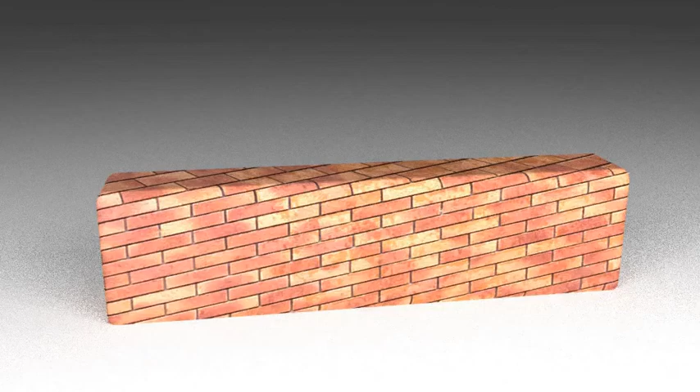As I said before, you can draw any object and apply the solids to it. You have to draw the plan of it before you can.

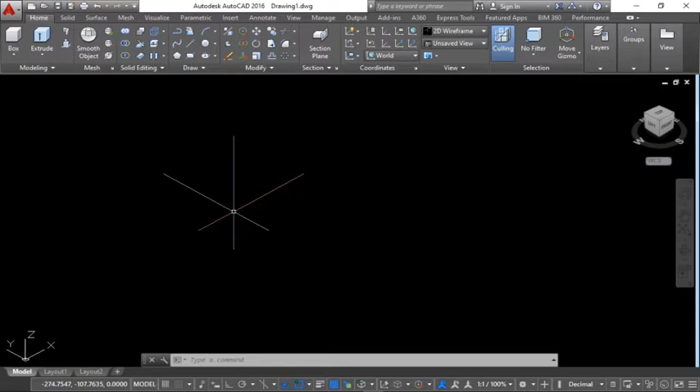Okay. All right, so now that we are having this, if you see this x, z and y coordinate here, meaning we are in the isometric view. You can draw your circle here and start drawing it, but to make it easy, to get your offsetting easy and your center point easy, to know the view properly, to see clearly that you are doing the right thing, you have to change it.

Since we are viewing this object from the top, the plan is you are viewing from the top of it, right? So we're gonna change this to the top view. But if you want to change, I'll do that one in a tutorial where it needs to be taught. All right, we're gonna change this to the custom view to the top view. Now that we are in the top view, you can analyze the drawing here.

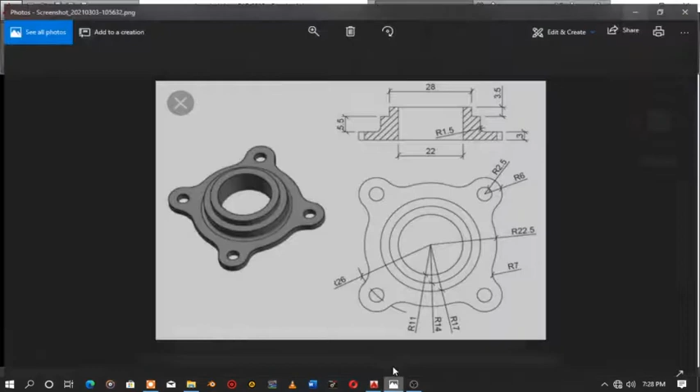So we have done the 2D drawing, so this is very simple. Meaning I'm going to have a center point, draw the circles, and these circles over here, and these circles over here. You get it? So let's draw these 1 2 3 4 circles, which are 11, 14, 17, 22.5. So I'm gonna pick C for circle.

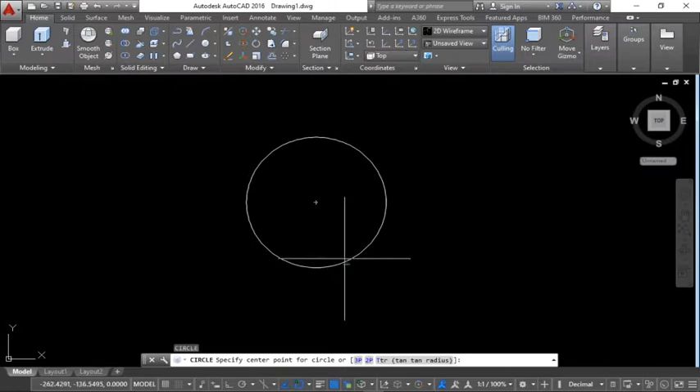I'm not going to do any construction line, so 11, enter to repeat previous command, then radius of 14, enter to repeat previous command, 17, then enter. Now that we are done with this, we are going to do another one, which is 22.5.

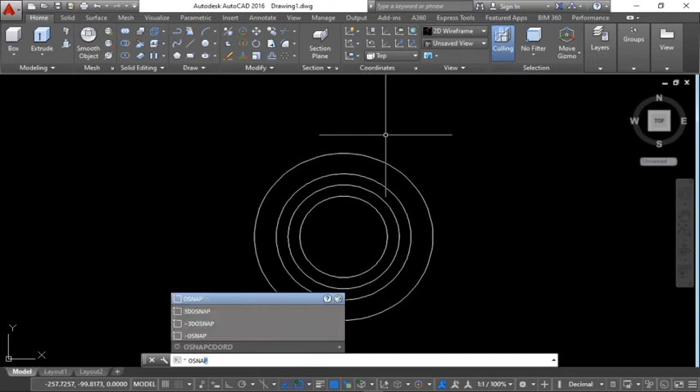So if you are not snapping the center point like that, you just have to type OSNAP, enter, then you select all the snaps. Just type OSNAP on the keyboard, enter, and you get this, and you select all, then okay. That's if you're not snapping the center points.

So now that we have this, if you go back to your drawing, you can see that we are having these 4 circles here, but we don't have any center point for them. But if you see from this angle to this angle, let's say we have a reference line here, and a center line also here, it's going to give an angle of 45, right? Angle of 45. We use that one later.

But you see, we are not having any center point, but we are having a center arc here. So how do you get a fixed point? Not having the center point to draw the circle doesn't mean we can't draw it. We have other ways of doing it, right?

So let's say you're going to draw a reference line, center line here, and this arc here will be meeting the center line over here. Then you stand there to draw this circle at this point, which is not going to be in diagonal form. It's going to be in a vertical form. After that, we do next.

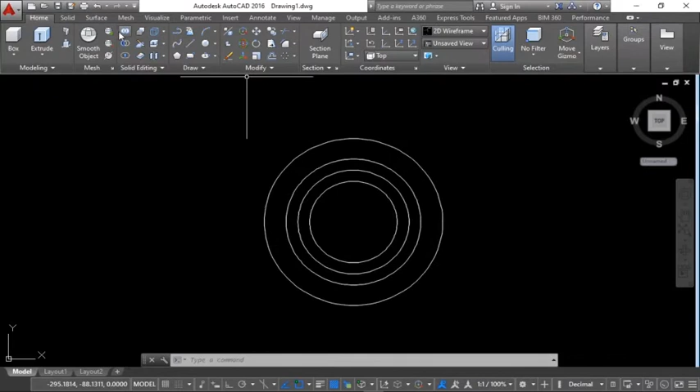Okay, let's go. So what is the radius for the circle? 26. All right, so circle here, radius of 26, enter.

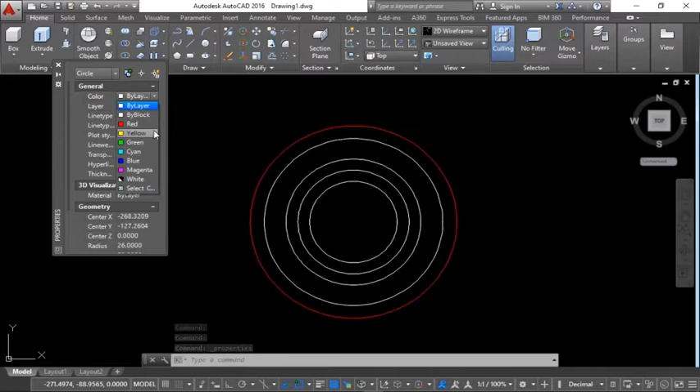Let's change this to yellow so that you can see that it is the center arc. So Control 1 for the properties of the line that you select, click once and click this drop down arrow and yellow, then you close this. Escape to exit the selection of the line.

All right, so let's draw this reference line here. I'll just point the point, and I'll just drag the pointer to this point, but I won't click.

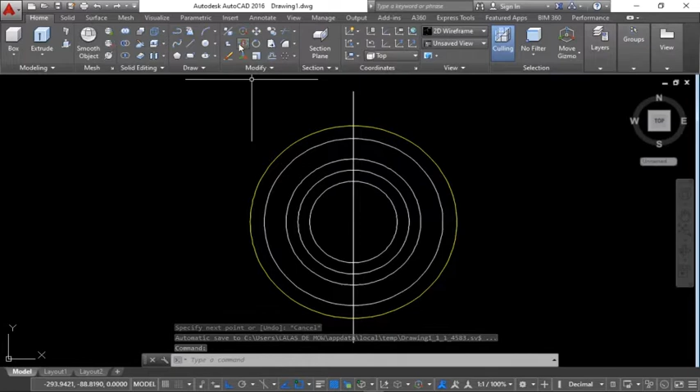Now I'll just move on. Since my extension is on, I'll get this green line, you see, then I'll click at the top, F8 to restrict our line, right, or the ortho mode here. So click escape. I'm going to have a circle here at this point, circle with radius of 6, enter again with radius of 2.5.

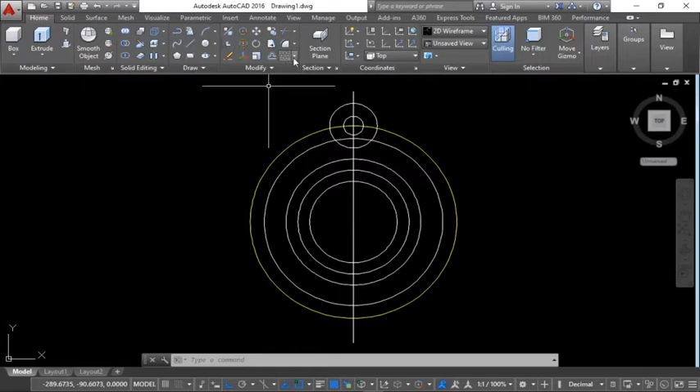2.5. All right, so now that we have this, you need 4 of it, so you can draw one there and draw one there and draw one there. I'm just going to click this, click down, drop arrow and choose polar array, then select these 2 objects, enter, then select the center of the path that I want to do the array on.

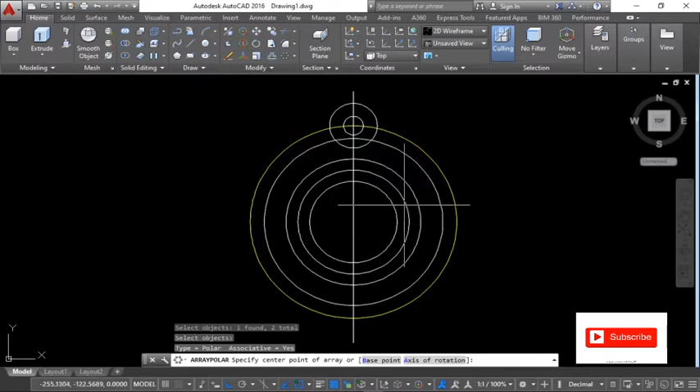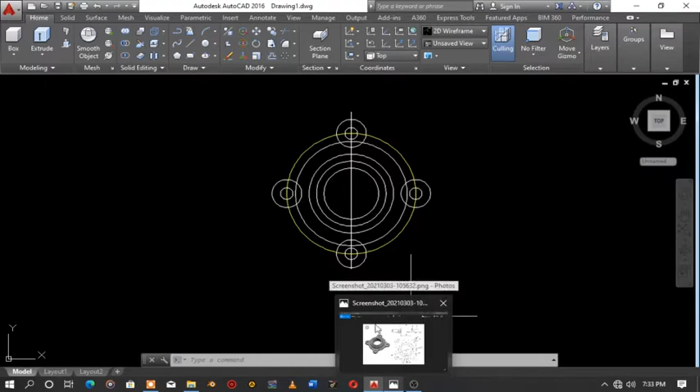So this is the path, and where is the center of this path? Right, so the center of this path is this. All right, click, then it's giving us 6, you need 4 of it, so 4, enter, then we are done. Okay, but we are not done, since we want it to be in angle like that, and ours is in horizontal and vertical positions.

So as I was discussing, we have a line here and a line here, you see, eyeballing. All right, eyeballing, let's use that word. So there's a line here and there's a straight line passing through that, which will give an angle of 45. All right, angle 45. So meaning I'm going to delete this,

then you select this whole object, then I click on rotate, or you click on the rotate first before you select, then you click at the center point. Then this time I'm not going to copy it, but we are going to rotate it. So our ortho mode is on, so you can rotate it to angle of 45, or you can just turn off your ortho mode. So now we are having it at the points, you see.

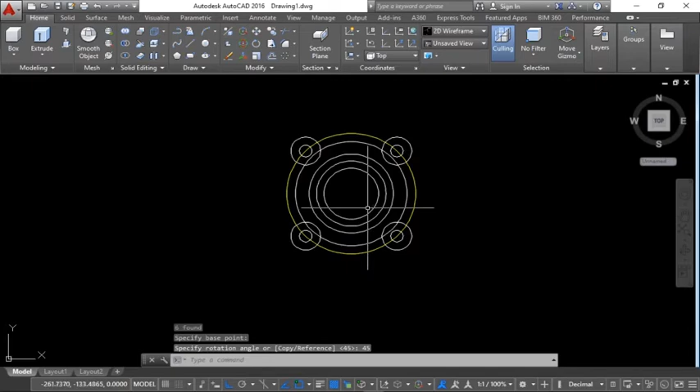So you can just take this off our sight. So we don't need it anymore. It's like using something and you don't want it again, just dump it. So now you can just trim this, but before you can trim, it's one body now, you can't trim it, you have to explode it first. So X on the keyboard, enter, then you select this, then enter to explode. They are now independent, so you can trim it.

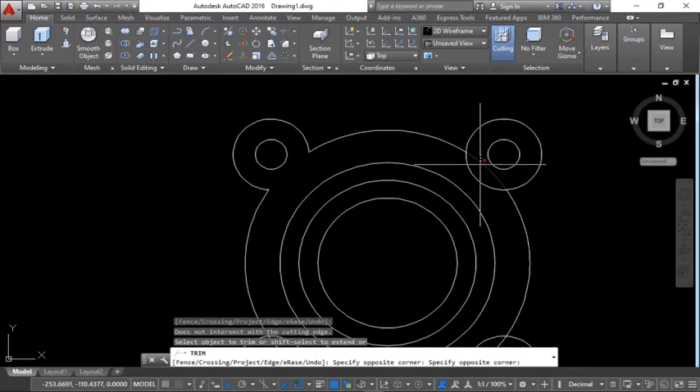So you select the trim, enter to activate the trim command. So click, click, you don't need this, you don't need that, you don't need that, you don't need that.

But due to this drawing, I think the plan is simple, that you can draw the same thing on the same floor, you can draw the same thing. But sometimes in some drawings, you have to draw this circle aside somewhere, draw this one aside, this one aside, then you fix it. You'll be moving and fixing them together. But this is very simple, so you can do them once and for all.

Right, so now that we are done, are you done? Yes or no? You're not done. All right, per the drawing, we are having this fillet over here, which is radius 7, because our drawing doesn't look like this, so let's make it look like that, right? So we're gonna take our fillet here, R for radius, then M for multiple. Type in M for multiple.

So I didn't punch in the radius, sorry. So R for radius, then you type in the radius, so radius 7. Sorry, I'm being confused. So fillet again, then R for radius, then 7 to be our radius, then M for multiple,

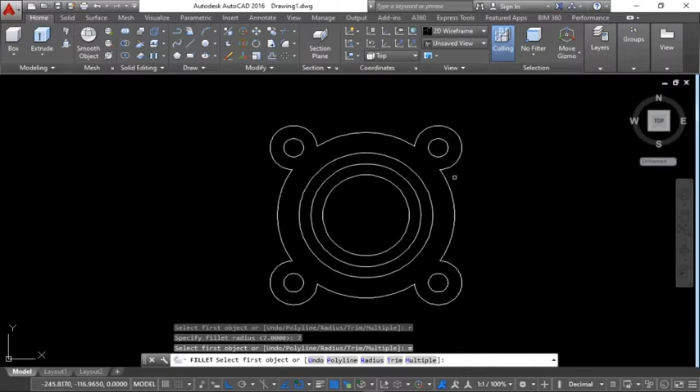meaning you're going to do multiple filleting along these angles with the same radius. Other than that, if you click this and click that, it will exit the command automatically, meaning you're going to do the same thing again. So the multiple will help you do multiple filleting at different angles with the same radius. All right, so if you are going to use another radius, that means you have to exit the command.

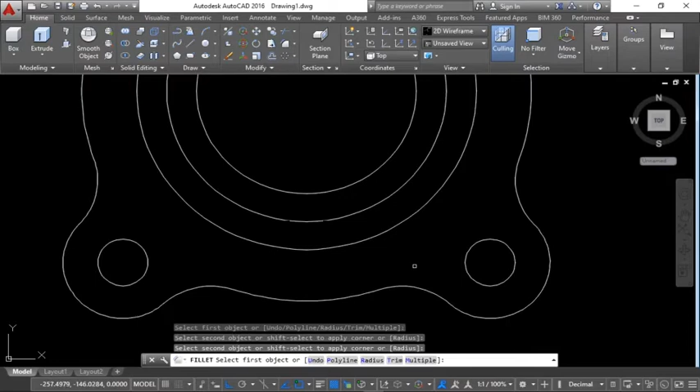Okay, and redo it and type the new radius that you want to use. So enter. Now we are done. Then we click here, the home icon here, to switch to the isometric view, and you can type J on your keyboard. Then you select all objects once.

Then you take our press pull, and now we're having this. No, we don't need it unless you press pull it. But I want to do the first one, the step first, which is 3, as per the sections over here. The first step here is 3, another one 5.5, and the last one is 3.5. Okay, so let's do this.

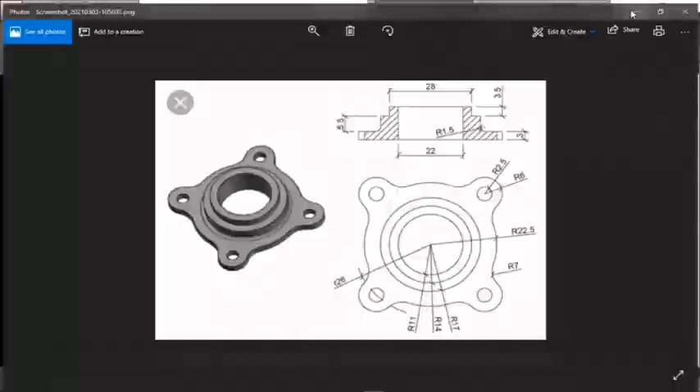We're gonna need this. See, all of them is being highlighted. You don't need it. We just need only. Okay, if you have to do this, you're gonna highlight everything. All right, so now you're having this. So initially, even these 3 circles were highlighted, so I just waited to get the last circle, and the boundary between this last circle and this object over here. So the height is 3.

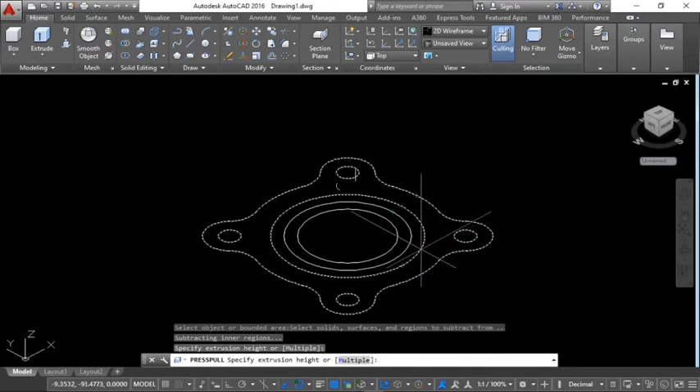Then let's switch to conceptual so that you can see what we have done. So conceptual over here, then we have these circles here. So the last here will give you 5.5. So we're gonna press pull again, select this portion, 5.5. So press pull again.

You are still in the press pull command, so press no, that's not what I want. So press pull, you select this. All right, so I'm gonna have 3. Am I right? 3.5. Oh no, meaning, okay, 5.5, and I'm going to have this is 3.5, meaning 5.5 plus 3.5 is 9. All right, sorry, so we didn't do our calculation well. Okay, 5.5 plus 3.5 is 9.

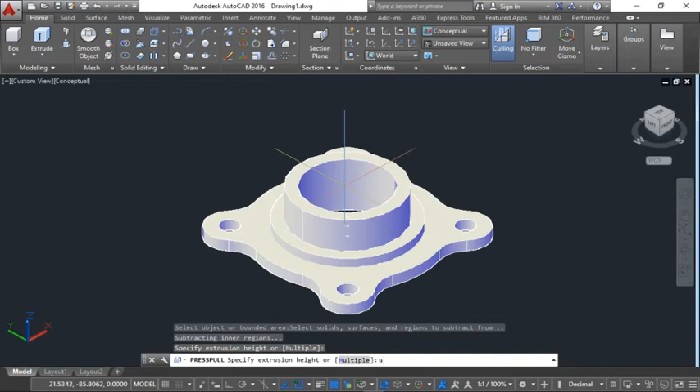All right, let's do Control Z again, escape, because we are press pulling from the ground, right? So we have to do that calculation. So we have to go 9, enter. Okay, now you're having it. You see, we are done, but you're not done.

Let's do one thing. Further in the drawing here, it says there is a fillet radius here to be 1.5. All right, so we're going to fillet this edge here. So let's do it. Everything will come in process as we'll be doing different tutorials. So you move to solid and fillet edge, then R for radius, type in your 1.5, enter, then you select this edge. Not the object, the edge. You're going to get this, then enter twice to confirm.

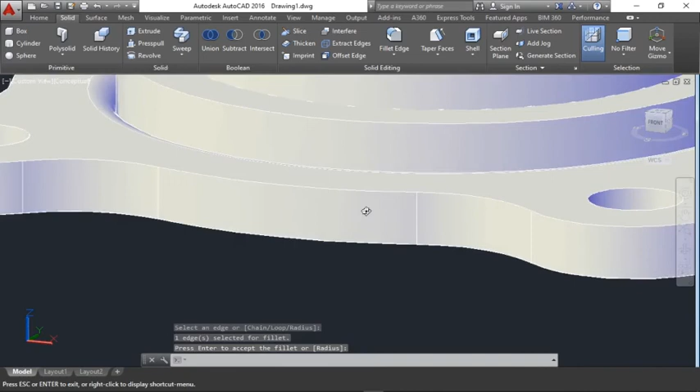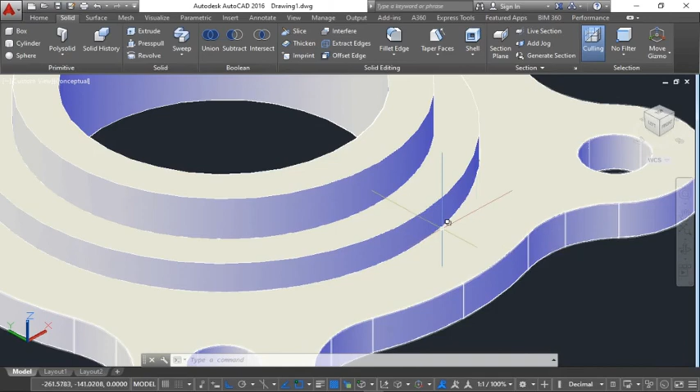So you see the fillet that we had. So we had it inward, which we needed outward. So what I'm going to do is Control Z and undo everything. The reason why we had that is because we're having this object different here, meaning we just filleted the edge of this base. That's why it's filleted inward, and this is shown in the section here. All right,

you're gonna join. You have to use the union. Select the union here. You select this, that, and that, then enter to confirm. So now you have one body here, so you can apply your fillet here, then R for the radius, then 1.5, enter, then you select this edge. So now this edge and this edge are joined together. There you go, enter twice to confirm. So now we have it in that direction.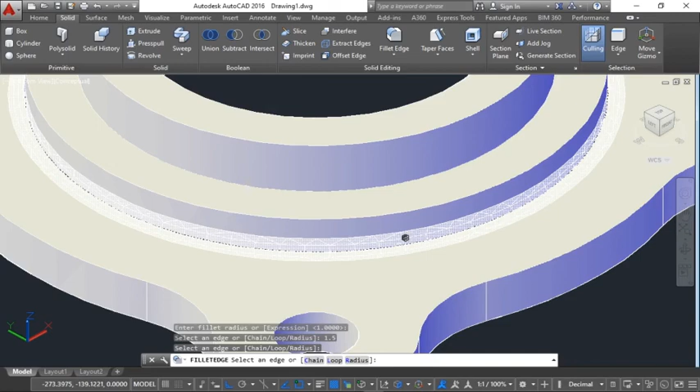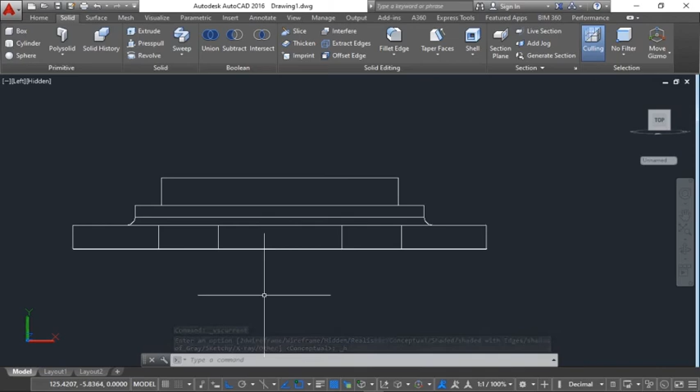So if I change this to the left view, you can now see we are having the arc here. And if I change this to hidden, you can see it. All right, so this is the drawing that we have, and this is how you do things. All right, so this is our object. We are done. Then change to realistic. We are done with the tutorial.

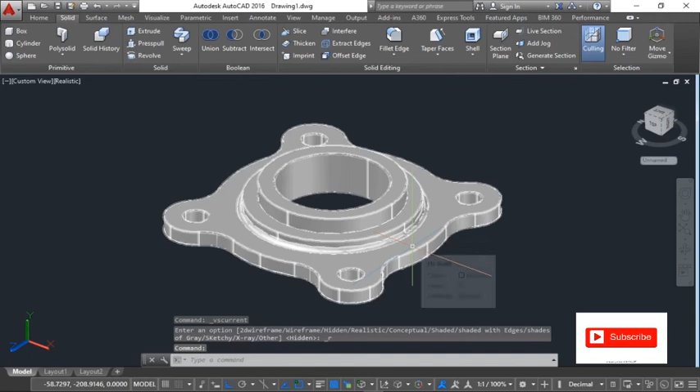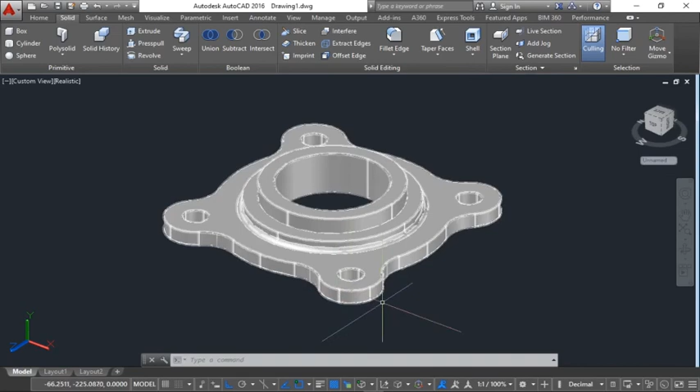Okay, so now you can see there are these lines over here. What I'm going to do is select this, right click, isolate object, hide, then select these lines, delete them, then right click, isolate, end object isolation, then it's back. All right, so we are done for the tutorial.